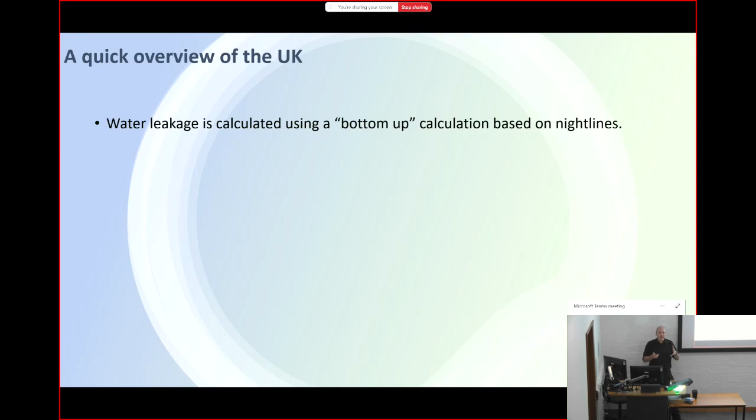And we said, okay, what we do is we monitor areas and we look at the night line. We look at how much water is being used at 3 o'clock in the morning. And we use that, and we say okay, that water use at 3 o'clock in the morning, some of that will be usage and some of that will be leakage. And we make estimates and we base it upon that. Do that across enough areas, round it all up, and you have a leakage figure for your calculation.

And then what we do is on an annual basis, well in fact we do it more frequently these days, you do a reconciliation. We go, okay, let's do a top-down full water balance, all the water going into supply where we think it's going, balance it up with our leakage at the bottom, the two should match up.

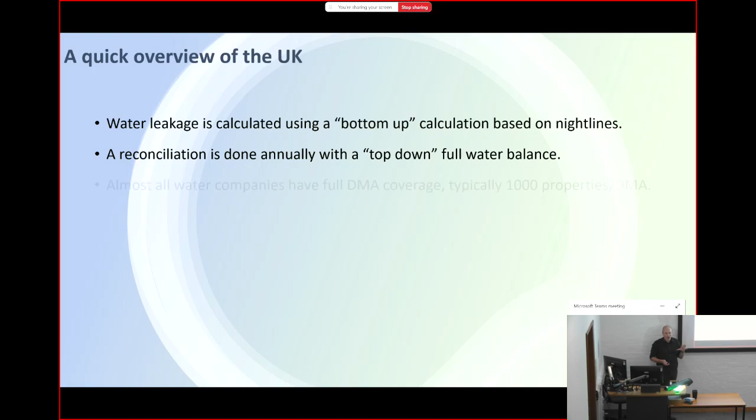In the UK, almost every company will have full DMA coverage, so a district meter area, DMA, typically about 1,000 properties in every DMA. And we have, as part of our reporting, we report losses on the customer side.

And this is the big difference. When you talk about international comparisons, typically they talk about non-revenue water. So as soon as water is charged for, as far as they're concerned, that's not their issue. What we have in the UK, because we came up with this bottom-up method of doing leakage, where we said okay, look, we're measuring all the leakage that's occurring, we don't know whether it's on our pipes or it's on the customer side, because it's happening at 3 o'clock in the morning. So we actually record customer side leakage as well.

And that can be on their supply pipe, the pipe going into the building, but actually loads of it we know is going on toilets and things like that. So what we call plumbing losses inside the house as well. So that's included in our leakage figure. And we estimate that that's typically about 25 to 30%, 35% of our leakage is actually on the customer side.

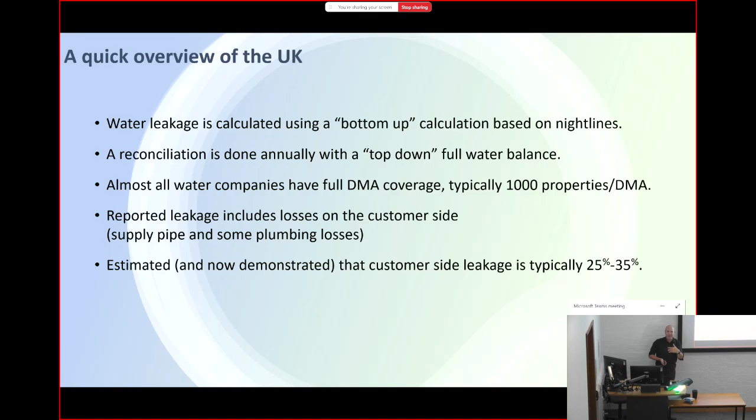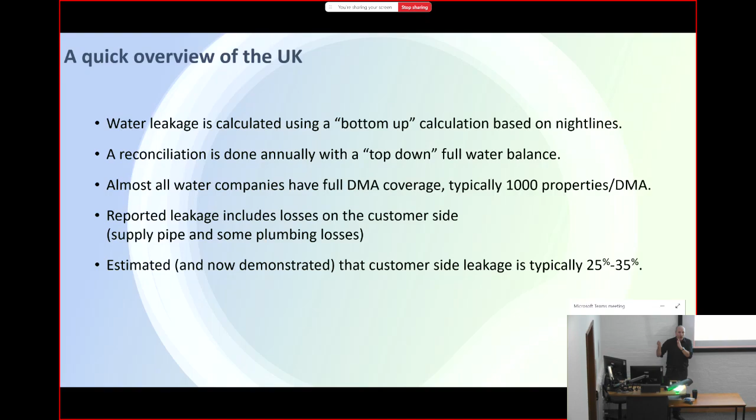It's one of the kind of messages we've got to get through in the UK with our press, who talk about all the company pipes are leaking. Every time you see those figures in the UK press, you can kind of take a third off, because actually our company pipes are about 2/3 of that, and about 1/3 of that is going to be customer side leakage.

So typical figures you'll find in the UK: 8.7 cubic metres per kilometre per day, 113 litres per property per day. That allows you to do some international comparisons.

I really don't like percentages for leakage. The reason is, imagine I've got 100 megalitres going into an area a day and my leakage is 10 megalitres - that's 10%. But if I double my consumption, getting everybody to use twice as much water, I've got 200 megalitres going into the area, still only 5% leakage. I've halved my leakage figure by simply doubling consumption. That's why we don't like using percentages.

But if we're going to do it that way, for my company we're leaking from our pipes about 8%. So again, mentally with a third overall total leakage, that's 12 to 13% within my company area, but our pipes are about 8% leakage.

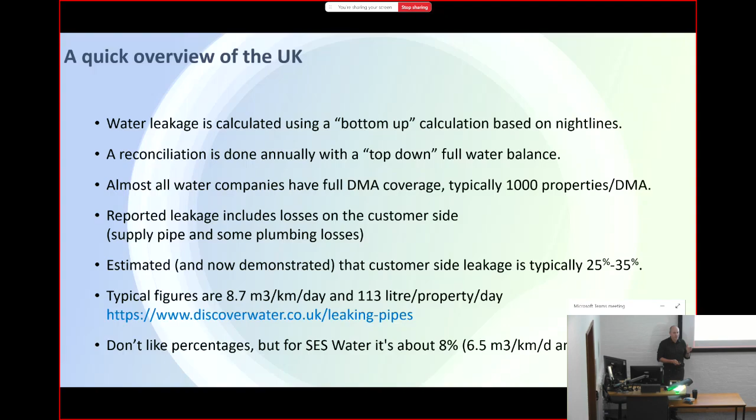They said by 2050, the estimated supply gap in the UK is 4,000 megalitres per day - that's the gap between how much water we have and how much water we need. They have since revised that figure and said, actually we think we got that wrong. They revised it up - they now believe it's 4,800 megalitres a day. To put that in context, that's the entire distribution input, all of the water supplied daily by Thames, Severn Trent and Anglian put together.

The reason for that is because demand is going to go up - more population, more usage and everything like that - and at the same time, our availability of water, because of climate change, is going to go down. So we are going to be missing nearly 5,000 megalitres a day in 25 years.

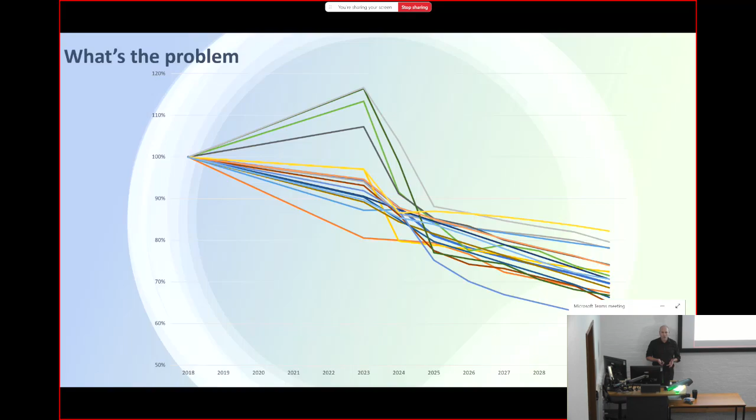We've now got to really push it down even more. And the reason is, if I plot every single water company's leakage figure on there, that's what I'm getting. Why are they going up? Because it's hard. This is not going to be easy. And a number of water companies are actually struggling to drive down their leakage at the moment. And it's not for lack of trying, it's not for lack of experience. They've got good people in there who know what they're doing. But this is really, really not easy to do, and they're struggling to manage it.

And so what we're doing is going, okay, look, in order to solve leakage, you need to bring in a multitude of tools. The danger comes is that everybody thinks there is one silver bullet that will solve leakage, one solution. You just put that in and that's going to solve leakage. There isn't. So we coined this phrase PALM: prevent, aware, locate and mend. You want to solve leakage, you've got to do all 4 of those brilliantly.

So when we look at prevent, we're looking at asset renewal, changing our pipes, finding the leaky old ones. When we look at pressure management, we're looking at network calming, stopping all the pressure waves going through our systems and causing bursts.

We look at awareness, let's understand where leakage is breaking out. If we can't stop it, let's at least know where it is. That's about dividing your network up into areas so you know where the leakage is occurring. It's about understanding, is the leakage occurring on my trunk mains? Is it on my distribution mains? Is it on the supply pipes? Is it within the customer's properties? Be aware of where that leakage is, and that's about DMA management, data consistency, flow analysis, all of those bits.

Fine, we now know that leakage is occurring in this area or on these types of assets. We then have to locate it. So you've got to go out there and say, okay, active leakage control, literally feet on the ground, going around, listening on fittings, trying to find the leakage. Acoustic correlation, so devices that are going out and correlating that leak and saying, it's louder here, quieter here, that means it's further towards this fitting. And then non-acoustic methods, and we're seeing a rise in those. Satellite solutions, fibre detection, all of these methods that are coming in that help us localise that leak and say, here's where it is.

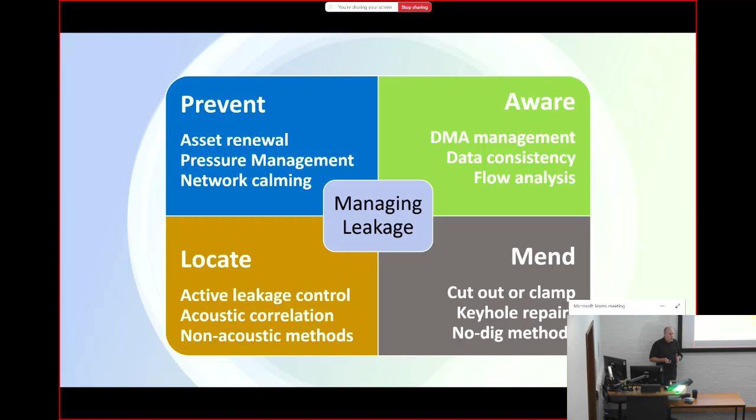But there is no silver bullet, and those of you who are thinking about going into the water industry and want to work in leakage, recognise this. You will help solve one of those areas, you will work in one of those areas and try and drive understanding in that area. But there is no one solution that will solve leakage.

I've got 15, 16 completed. We have a load of research going on across the UK, and this is fundamental research, trying to understand mechanisms. I have PhDs working on understanding the failure mechanisms of cast iron, how cracks develop and grow.

I've got other work going into acoustics - how do we make sure we get the best value out of all the sound that's coming out? I've got research projects where I've brought in a consultant to look at all the metering data, and say, if I've got all the smart meter data for an area and I know the flow going in, can I balance the two up and understand what's going on in that area better? So there's a whole host of research going on in that area.

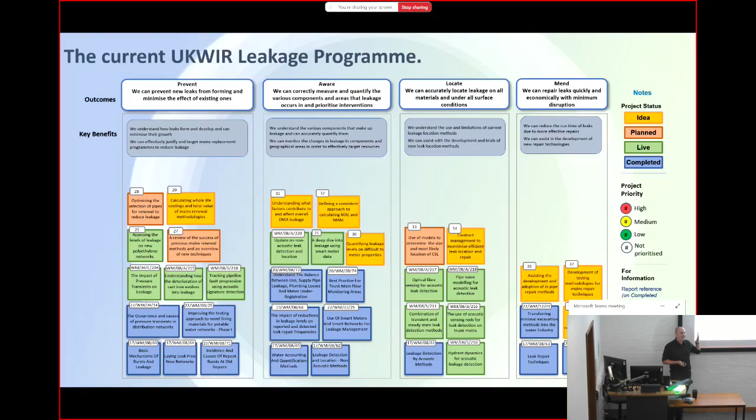But as I said, this is generally fundamental research. What we've also got is other stuff as well. The great news is the water companies collaborate almost completely on water leakage. It's nice - we don't get benchmarked against one another. I showed you that graph with all the different companies. There's no financial disincentive for me to share my expertise with other water companies.

Although we are monopolies in terms of how we operate, we are encouraged to share and collaborate. We fund joint research, but we also share the results from our own projects. Each company will have their own little projects that they're working on. And what we've done is put that all together into something called the Leakage Innovation Heat Map, which is almost unique, certainly in the UK, as far as I'm aware worldwide as well, where we map out all of the research that's happening in leakage in the UK at the moment.

You can actually download it. It's publicly available, it's on the UKWIR website. You can go to that site and pick up this project list. It will give you 420 projects within companies, either recently completed or live at the moment, or even ideas saying these are the problems we're looking at the moment.

What I've also put on that heat map is all the shared innovation fund projects. Ofwat have got a massive innovation fund that we can pull upon, and I've put all the ones that relate to leakage on that list as well. The UKWIR projects, links to the actual projects are on there too, so you can download and read those studies we've done, and Spring showcases. Spring is the innovation platform for the water companies, and you'll find a number of showcases on there about various solutions people have shared.

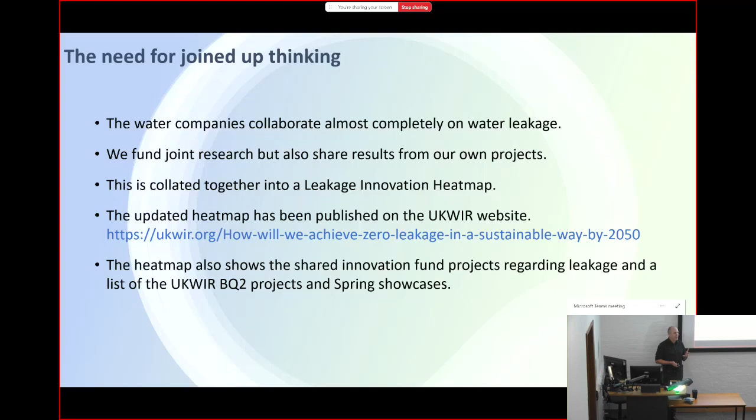So there's a wealth of information. The idea of this was to be a one-stop shop you could go to and find out what is going on in leakage at the moment in the UK. So the kind of details you get - company projects, as I said, nearly 420 in total - it will give you what the project is, broken down by project type.

The green are prevent ones, then you've got aware ones, but even within that we break it down by sub-areas as well. So if you want to look at supply pipe replacement projects, all of those you can see at the top. And you can see it by company and what they're working on.

It allows us to start to say, okay, how much research is occurring in different areas? And this is what we found: 18% of all our projects are actually in prevent, nearly 70% are in awareness and location, and poor old mend, as I said, 11% there. If you look at the live projects, it's a similar view - most of the research taking place in awareness and location, but very little in prevent, and hardly any in mend.

Part of the reason behind that is how our companies are structured. If you look at it, our leakage managers have control of awareness and location. So they have the software solutions dialing out, bringing in information on what's going on out there, and they control the teams that go out looking for the leaks. So therefore it's quite natural those are the bits they can control. Typically prevent will be managed by another department because it's the department that actually manages the network - they open and close valves.

They're about network pressures and network calming, and they tend to deal with network replacement as well. So though the leakage managers have influence there, they tend not to control that area.

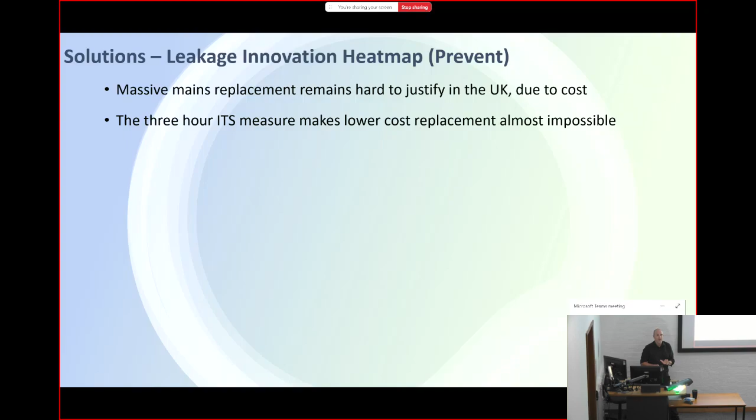In addition, in the UK, we have a 3-hour interruptions to supply measure, which says you're only allowed to turn water off for 3 hours. That's almost unique - I'm not aware of anywhere else in the world that really has that measure. And what that means is that any solution to replace the pipe which uses the existing pipe - so if you're going to slip line down a pipe, drawing another pipe down the old one, or if you're going to reline a pipe using a structural or semi-structural liner and you've got to use a dry pipe to do that, you've got to drain it out - all of those methods are really difficult to use within the UK. So it makes lower cost replacement almost impossible at the moment.

And the problem that we've got is our system's increasingly aged and needs replacement. What we do need is a good understanding of asset condition. So we know that we have loads of cast iron still out there, 40-50%. But what condition is that in? It's buried 1 metre below ground. So what we're trying to do is build our understanding of how that fails and what's the current condition of that asset.

One of the pieces of work I've been doing is effectively using a Canadian technology that uses a sound pulse. In the old days, what they used to do when they had a steam engine and wanted to check the integrity of the wheels is they would walk along with a hammer and bang the hammer against the wheel.

And if it went bang with a nice loud ding, it was good. And if it went dunk, you'd know there was something up with it simply by the sound it made, because the speed of sound changes as it goes through different materials. So by using the speed of sound passing down cast iron mains, we can tell the condition of it. And we started surveying our mains to do that within my company.

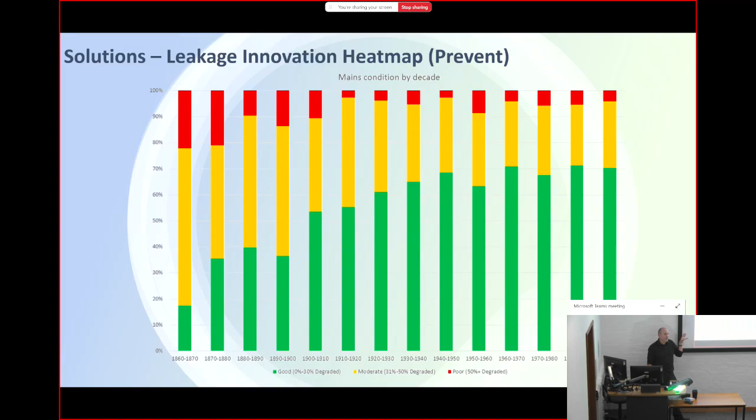It's not even as simple as saying our older pipes leak more. So one of the things that's now published is the data sets for all of the water companies. In fact, you can go on something called Stream Open Data, and you can download data sets for all of the water companies, and I did that.

So I downloaded every water company's data set, and one of the bits of information they have on there is how much main they've got pre-1960s. So I said, okay, let's do a simple correlation. I can see your leakage figure from your data sets, and I can see how much main you got pre-1960s. Let's put a little experiment up there. My view would be is that if you've got newer mains, they should leak less.

Part of that is because since 1960, we've had 3 new materials introduced. We've had ductile iron, PVC, and polyethylene. As each new material came in, there was a learning process on how to use it effectively. Ductile iron came in, and we just threw it in the ground, and then only about 10-15 years later realised that it corrodes faster than cast iron, and we need to wrap it. And you now start to see all sorts of layers over the ductile iron in order to protect it.

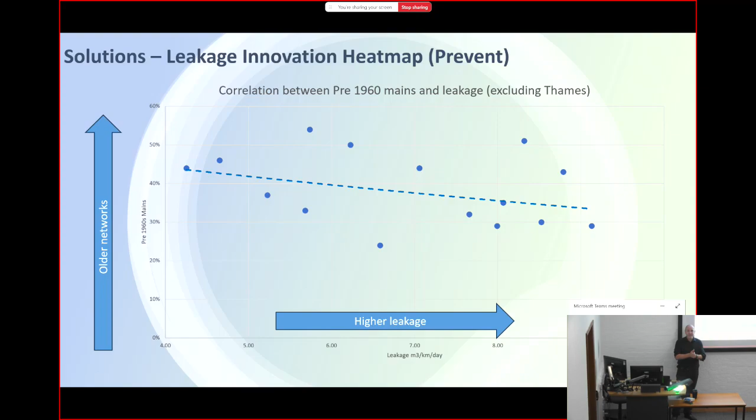And then PE came in and we said, what a wonderful material. PE, we can bend it all over the place, fantastic. Can we join it? No. I can see shaking of heads around the room. Joining PE remains really difficult to do, because every time we're doing fittings, we do them in the lab and it works absolutely perfectly. And then we take it out onto site where effectively what you're going to be doing is melting plastic and pushing it together, and suddenly we're on a site that is dirty, wet and muddy, and it doesn't join so well. And it may get a joint at that point that holds pressure, but a year down the line, suddenly that joint fails. So we struggle with these materials as they come in.

We need to make sure that as we introduce these materials, the training materials are there to make sure that they don't leak in terms of what we're doing there.

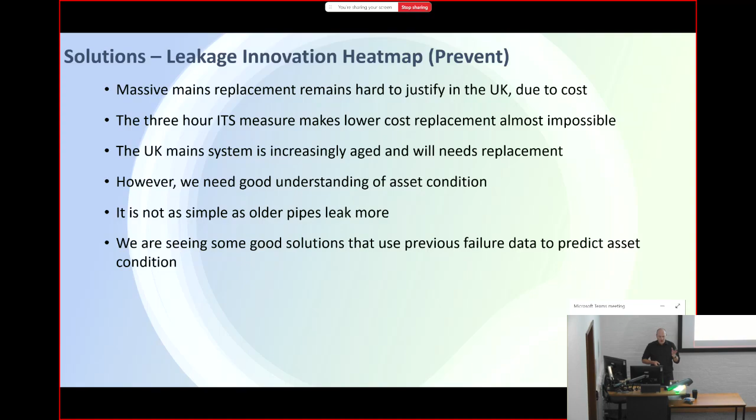What we are seeing is some good solutions coming through using previous failure data, and that's starting to predict our asset condition and saying this is where we're going to see problems.

I wanted to touch upon pressure management as well. Pressure reduction is a vital tool in reducing leakage. We've got a project at the moment called DMA Asset Health, and that's probably state of the art in the UK. We have the most pressure managed number of properties in the country.

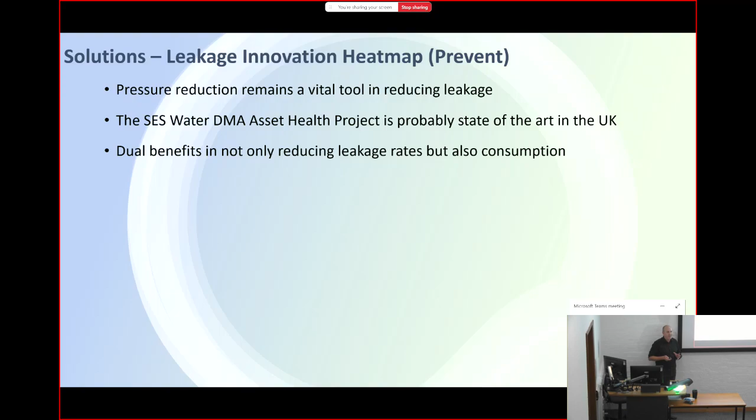80% of our properties are under pressure management. It has a dual benefit - it reduces leakage rates, but it also reduces consumption. However, some of the latest research I'm seeing is suggesting that as you reduce the pressure, you will get a short-term benefit, but it may not be there long-term. Your mains may then start to crack again and things like that. So it's not as simple as just reducing pressure is going to solve absolutely everything.

We are finding, though, even within our highly optimised systems - and we started doing DMAs back in the 80s - we're still dividing them down and getting smaller DMA areas. Pressure calming, stopping those transients going through the network, is extremely important. Less so if you've got a fully plastic or at least a PE system, still relevant if you've got PVC. But pressure calming is increasingly becoming important.

We're starting to recognise how many pressure waves go through our network. I did a research project recently with UKWIR that looked at the causes and effects of transients going through. We found that our networks are really, really noisy - loads of pressure waves going up and down our system. What happens is those pressure waves simply move through until they find a weak point, and you've got a burst. So calming is really important as well. Keep your systems as calm as possible.

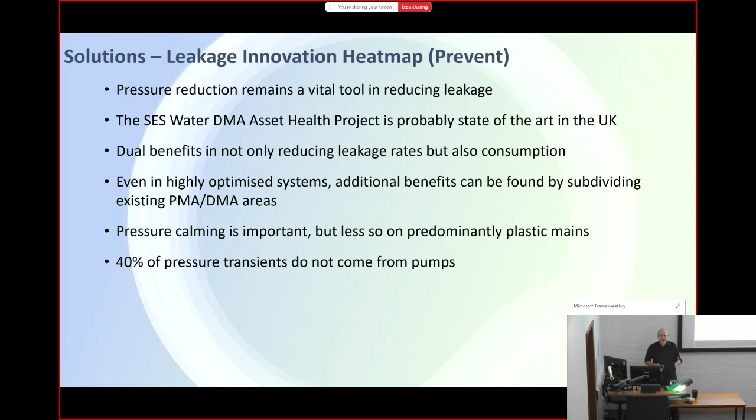We know that about 40% of those pressure transients don't come from pumps going on and off. It's ball valves slamming shut inside large properties and things like that. It's network operations where you're opening up a valve or a hydrant that are causing pressure waves to go up and down the system. When you talk with water companies, they'll tell you that the quietest day for leaks tends to be Christmas Day, and the reason for that is because that's the least amount of network operations.

Awareness - most awareness solutions in the UK depend upon DMA monitoring, monitoring these small areas and trying to understand what's going on with them. In my company, most of our DMAs are a single feed, but a number of water companies have multi-feed DMAs. Now, multi-feeds are useful in the sense that if you have a burst upon one of your entries to a DMA, you've still got another way of supplying water.

However, for managing leakage, they are a bit of a nightmare. Because if you've got 2 meters coming in and one goes down, effectively you're blind. I know some companies that have got 6 or even 7 meters feeding a DMA, and as soon as one of those has a problem, effectively you don't know what's going on within that area. So multi-feed DMA is less than optimal.

In the UK, the standard data granularity is 15-minute data. So we sample every 15 minutes and we bring it back every hour.

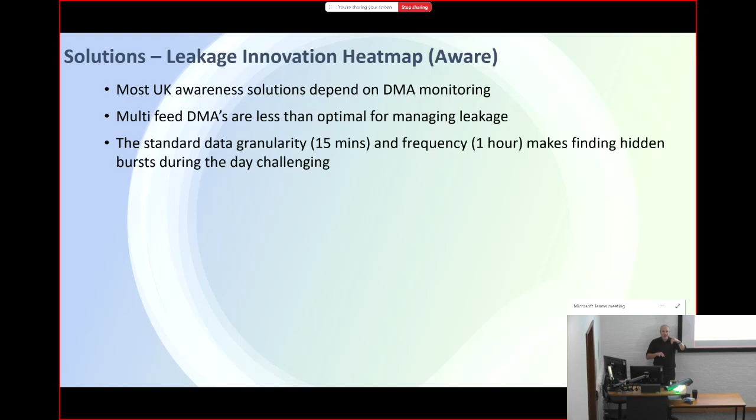The reason for that is because of the old loggers we used to have. When I entered this industry, I would go out installing loggers in the field. I would go out and find a hydrant, put a pressure cap on it with a fitting, and I would take my logger, which I programmed up in the office because we didn't have laptops, and I would plug it in and leave it there for 2 weeks, then come back 2 weeks later and unplug it. That logger I had to carry around in the car with a battery only had a certain amount of data capability. As a result, the whole industry standardised back then in the 80s on 15-minute data.

Unfortunately, even with all the modern data sets coming through, the modern capabilities, we still run on that 15-minute data.

What we find is that makes finding leaks during the day very challenging. When you're looking at 15-minute data, looking at consumption actually occurring at the same time, it's nigh on impossible to find a leak in that data. That's why companies use that night line. The only way they're going to be aware of a leak breaking out is by looking at 3 o'clock in the morning and saying, has the area gone up then? Because during the day, the signal to noise ratio is too difficult.

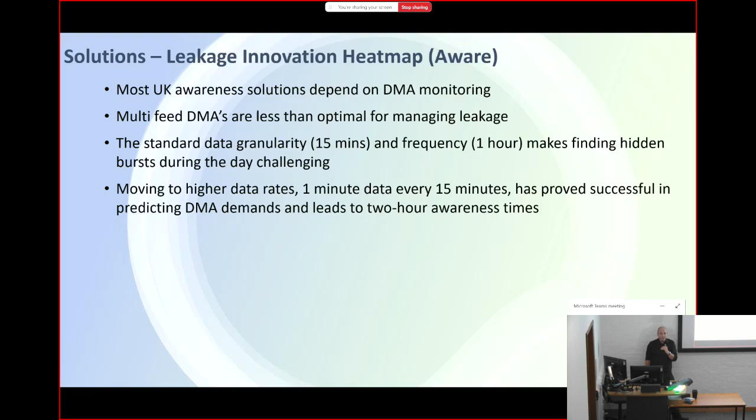We've been moving to higher data rates. Within my company, we've actually moved to 1 minute data every 15 minutes. And when we did that, we found that we could do DMA predictions during the day. So that's actually led to, within SES, we now have a 2-hour awareness time. Rather than having to wait for that night line, we now know roughly within 2 hours of a leak breaking out. And that could be a hidden leak under the surface, with no customer phoning in.

Just to give you an example of what that actually means: I talk about night line and using a night line. Typically for awareness, it's 3 days. So let's imagine a hidden leak has broken out just outside the building here, on the pipe outside. Nothing showing on the surface, and it's not affecting your water supply in here to the degree that you notice. What will happen is the local water company will see that go up, they'll see the DMA go up. So if it happened today, they're not going to see that until tomorrow at 3 o'clock in the morning.

And then they're going to come in, look at their data and go, oh look, that DMA's gone up. But you know what, it could be this place filling a tank. There could be some reason for legitimate use at 3 o'clock in the morning, you may be running experiments at that time. You go, no, that's exactly it, and it's not going to happen the next night. So no company will act on a one-night jump. Almost inevitably, they leave it for 2 nights. So it will not be until the 3rd day that they'll actually send anybody to investigate and start looking in that area. So the jump from 3 days to 2 hours has made a huge difference in terms of our awareness time.

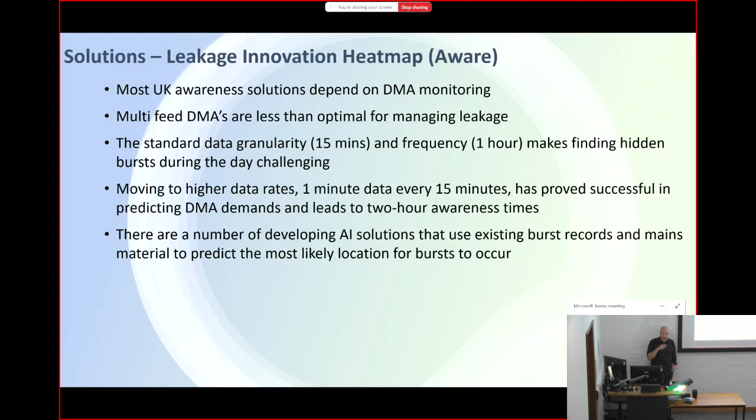There's a number of solutions now that use AI, looking at existing burst records and mains, saying okay, where do we think it's most likely to go? If I'm going to be sending people into an area, where do we start looking? What are the most likely mains to burst? And what's really interesting is that awareness tool is becoming increasingly an operational tool.

One of the things we're struggling with in the UK at the moment is what we call mass breakouts. One of the things I talk about is 3-mode breakout. We say bursts occur primarily because of pressure waves going down the pipe, finding a weak point and popping it. But we also see it in a winter breakout, a freeze-thaw event, where effectively the ground heaves. It's a one-off event. You come in one morning, it's been 3 or 4 days of heavy frost. As a leakage manager, it's a horrible feeling because you come in that morning and suddenly half your DMAs have jumped as a result of bursts. But it is a one-off event that just happens on that thaw.

The other one we're seeing, even more concerning, is climate change with soil dry out in the summers. The last 3 years, we've seen soil dry out and wet out in the summers, and that causes certain soil types to move massively. The peats around here, the clays in my area, massive ground movements underground. And as a result, you get a mass breakout of bursts. One of the predictions I'm making is that this is probably going to become one of the most prevalent causes of leakage in the UK with these mass breakouts.

That's why awareness tools are going to be increasingly important, because when you have a mass breakout like that, the awareness tools tell you where to start looking and enable you to get ahead of the game. One of my neighbouring water companies actually ran out of water from one of their water towers, one of their reservoirs, as a result of a mass breakout, and it meant thousands of customers were out of water for 4 days. The reason I tell you it's a neighbour is because we had exactly the same weather conditions, but we had our smart network up and running. During that same period of time, we lost supply to 48 customers for just over 3.5 hours. That's the difference good awareness can make. So the awareness tool is not just leakage, it's an operational tool.

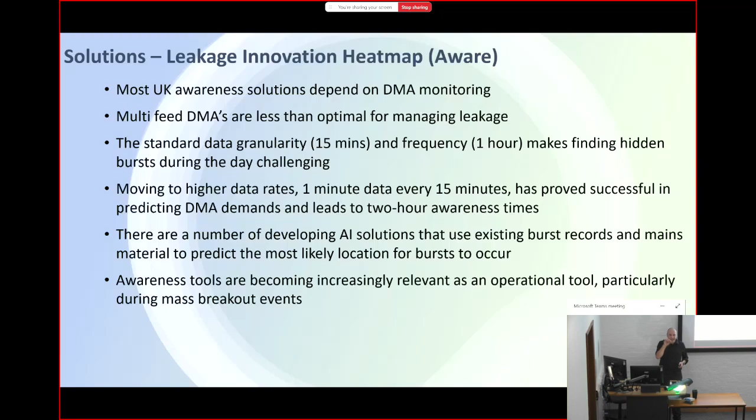Location. Many companies have got really well-developed acoustic networks for finding these leaks. But it's complex. You have loads and loads of loggers. Birmingham has 20 to 30,000 acoustic loggers spread throughout the city centre there. The analysis of that is complex. That's a lot of data points to look at.

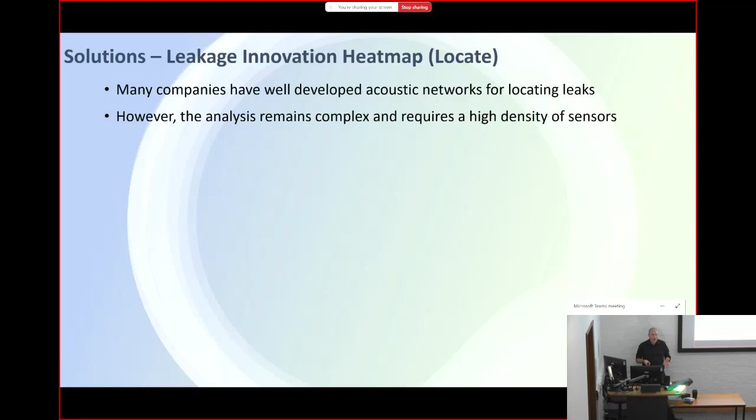In addition, because the sound doesn't carry too far down the mains, you're going to need loads and loads of sensors in order to do that. So although acoustics remains a well-developed system, companies are looking around for alternatives and going, how else can I locate leaks without having to put loads and loads of sensors out?

Anglian really pioneered the use of hydrophones. When we talk about acoustics, we're typically talking about accelerometers. These are devices a bit smaller than that, and they sit on top of valves and things like that, picking up the vibration of the valve. A hydrophone, by difference, actually touches the water column. So the sensor is in contact with the water and therefore gets a better signal. As a result, you need fewer sensors within your network. Hydrophones are particularly good at locating leaks on plastic because it doesn't attenuate the sound so much.

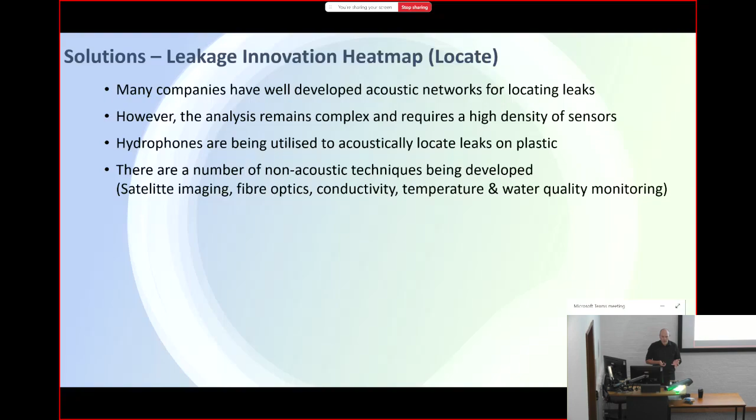A number of non-acoustic techniques are being developed, so satellites, and fibre optics using what's called dark fibre. This is where your cable company has gone down the road and laid a fibre network. We can actually use that fibre network and the vibrations of a leak causing a vibration in that fibre network. We can use that sound, that vibration, and localise the leak coming back from that as well. Water conductivity, temperature and water quality monitoring are other methods we're looking at to say how can we localise these leaks better.

A number of companies have been using satellite technology, with a variety of results on that one. And fibre optic, as I said, I think that's one of the most interesting areas because we don't have to deploy sensors - typically there's already dark fibre down those roads. It's just a question of how we hook into that dark fibre and start to use it. We're seeing some really interesting trials in that area.

Micro pressure variation - that's one that my company's been working on and developed quite a bit. So this is saying, okay, when a burst occurs, it will actually drop the pressure locally around that burst. Can we detect that pressure drop and react to that?

Now, there's a beauty about using micro pressure variation. With acoustics, it's really hard to tell from the sound what kind of burst it is. The big bursts actually tend to make the least sound. Where a pipe is fractured and running full bore open, there's very little noise coming out from it.

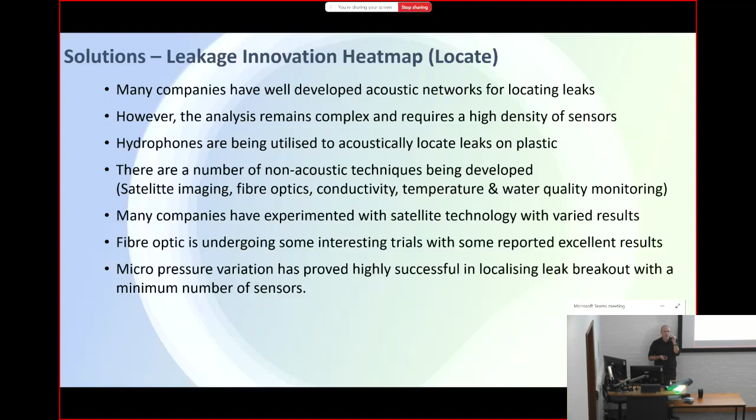With micro pressure variation, the size of the burst will directly affect the amount of pressure that we're seeing. So what we've been doing is deploying a number of sensors within an area, typically about 5 to 7 sensors, to measure the pressure and look for small changes in that pressure and see what that can tell us.

One of the areas, we're running this in about 10% of our area as a trial, and we were going out and opening up valves in order to try and simulate a leak and test it out. And then - I won't say fortunately, because I don't like bursts - we had a burst within one of the areas where we're trialling this. Now you can see the burst actually occurring here.

So here's our normal daily pattern, and here you can see there's a jump. That's the burst breaking out, and that's the repair. The area that it was in, Edenbridge, a small town just south of London, had 881 properties in the DMA there, and about 12 kilometres of main.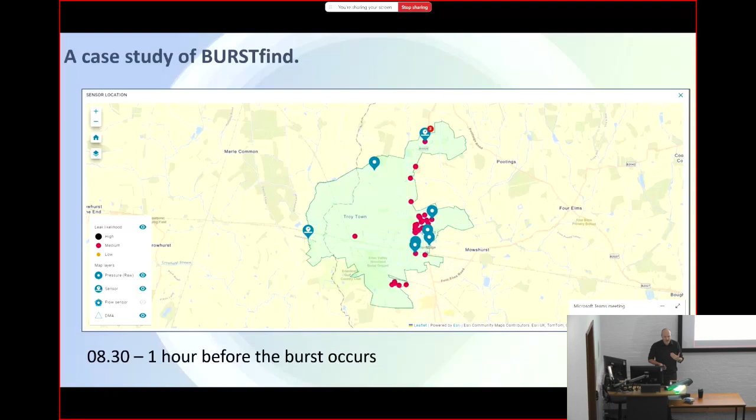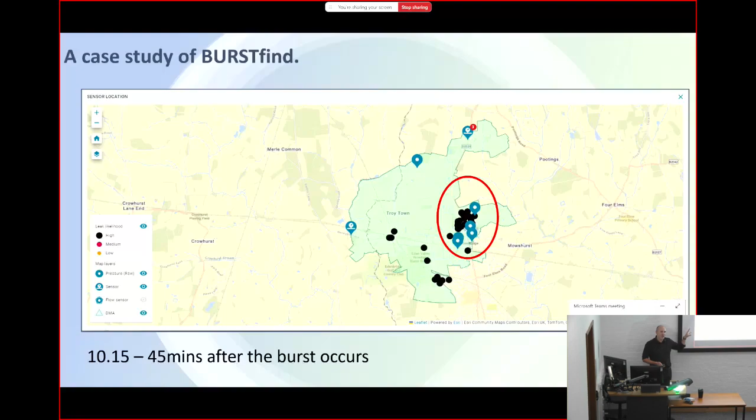8:30, one hour before the burst occurs. 45 minutes after that burst has occurred, you can see the change straight away. I now have high pressure loss in the area. No customer has phoned in, nobody has reported it, but our system picked it up and had alerted by this stage to say there's something going on. You can see that concentration of black spots on the right-hand side.

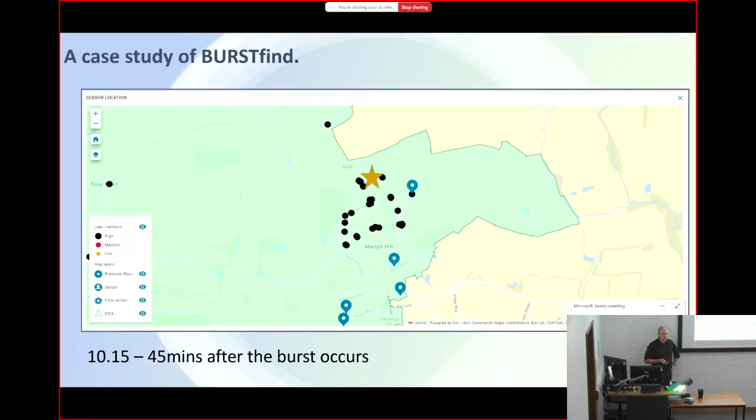As we zoom in, you can see there's loads of low pressure alerts coming in around that area, and you can see where we located the burst when we sent an inspector out to find it - a hidden burst, nothing showing on the surface. The beauty of that one is this: that leak occurred at 9:30 in the morning, peak time, the hardest time to locate a leak because everything else is going on at the same time. Our BURSTfind system reacted within 45 minutes and localised it down to street level.

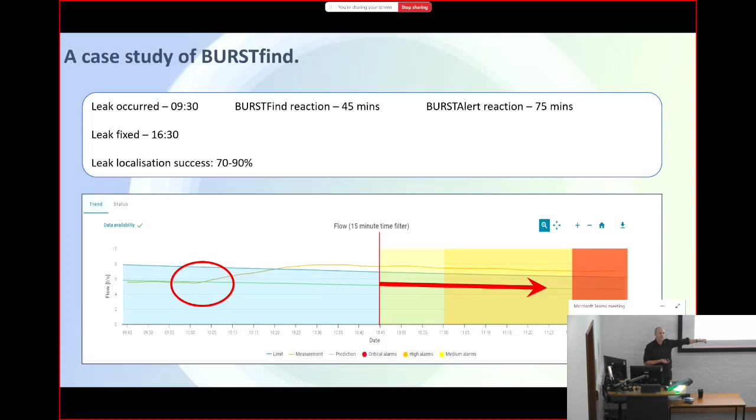Interesting enough, the DMA alert system, which uses a learned flow profile using AI, alerted within an hour and a quarter, 75 minutes, so that was later. We got the leak fixed by 4:30 that afternoon. Now that's really impressive - no effect upon customers in terms of going out of supply until we actually went out and did that leak repair. That's the kind of system that makes a massive difference in terms of driving down your leakage. Once a leak has occurred, the clock is running - the longer you leave that leak running, the more water you're going to lose. So awareness, location, and mend need to be as fast as you can possibly make it.

Okay, that leads on to the final bit: leakage innovation heat map is mend. Yes, as I said, very little development work on mend. It's the area with the greatest spend, 52%.

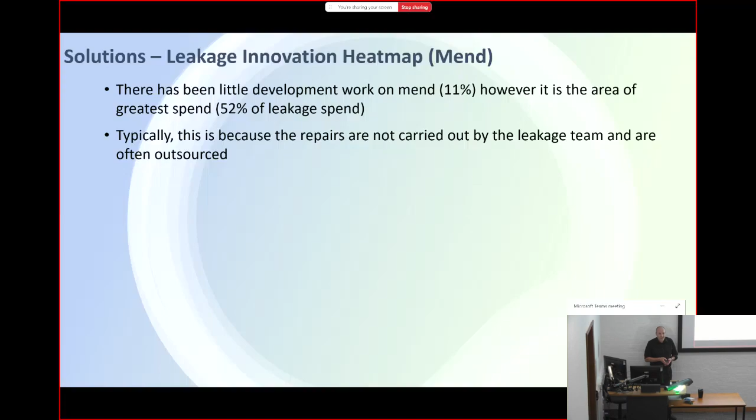Typically, this is because the repairs aren't carried out by the leakage team, it's outsourced. Unfortunately, if you're a contractor, what happens is you win the contract to do the main repairs for a certain water company, and the first thing you do is go out and get some JCBs, because you're going to need a lot of them. You're hiring these JCBs - they're owned by another company, you hire them, and they sit in your yard. But while they're sitting in your yard, they're not earning you money, so you want them out digging holes. So if you have JCBs, everything looks like a hole. And if the water company comes along and says, 'I've got this amazing new method, we can repair pipes without having to dig holes,' what happens to my JCBs?

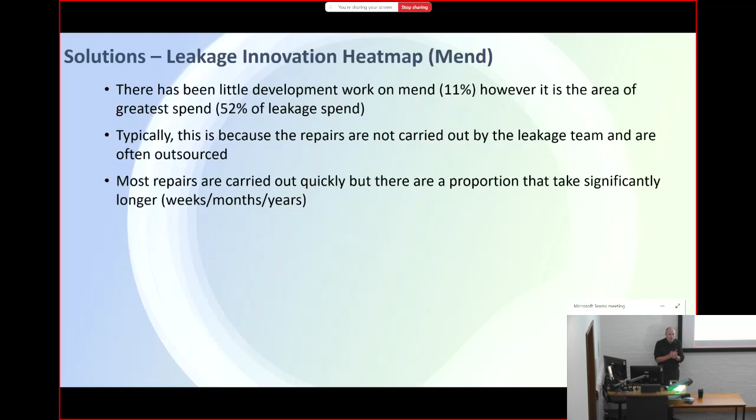Now, I don't want to be unfair on contractors - they're incentivised to do that because that's how we write our contracts, that's what they bid for. What we've got to do is come up with different ways of managing our contractual arrangements to incentivise the right behaviour. Most repairs we know are carried out quickly, but there's a proportion that takes significantly longer - weeks, months, in some cases even years. The reason for that is it's not a big leak, and the cost of actually repairing it is so disproportionate to the actual cost of water going out through that leak, that companies will say it's not worth going in until it's showing on the surface, until it's causing a disruption to our customers.

How do we deal with these ones? As I said, most contractors have little incentive for low dig and no dig methods. Let's talk about low dig - it's the idea of keyhole surgery. When I describe it, I always say I'd like to be able to repair a pipe through a piece of A4 paper - imagine laying that down on the ground, digging down, carrying out a repair, and then reinstating through a small hole. It has a number of advantages: it's less disruption, and it's far more acceptable to the councils for you to come in and do work like that. So we're looking at low dig methodologies as well.

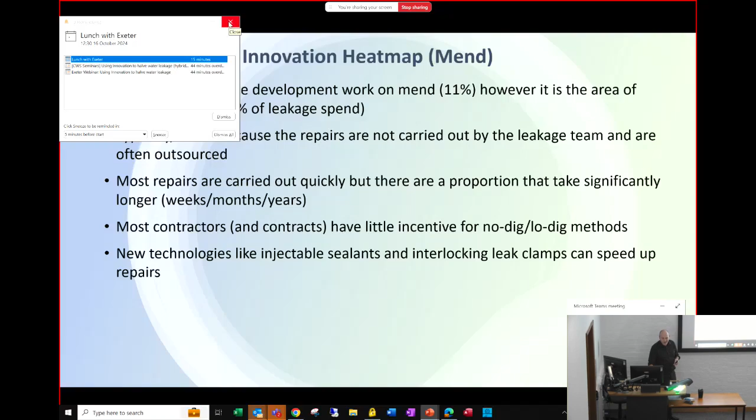One of the rises of things we're seeing is sealants. There's a number of companies that have developed sealant solutions. We're starting to use those on small diameters, so typically supply and comm pipes. But actually this is like Radweld for pipes, where you literally inject this solution down, it's going through, it's finding the leak, and it's sealing the leak at that point. Now to me that's a brilliant solution.

I really love that idea that we can seal. We don't know the longevity of these. The ones that we've done have been about 3 years old and they seem to be holding up absolutely fine. But you know what, to me actually longevity isn't the main issue.

I'm very, very happy with the idea of temporary repairs, and I'll tell you why. Because you're thinking, no, hang on, everything should be permanent. If you cut your arm, it's a nasty bleed and you're going to have to go to the hospital to get it fixed. Do you leave it going full flow? Just let it bleed out on the way to the hospital? No, the first thing you're going to do is put a temporary repair on, a clamp, a plaster, a bandage, anything to stop that fluid getting out, because blood is valuable.

You don't want it leaking out until you can do a full and proper repair. Think about water in the same way. If water is valuable to us, a temporary repair where we can reduce that flow rate until we can do a full repair is important and valuable to us. So don't rule out the idea of temporary repairs. They are equally valuable for water companies as well, if we can start to get those in.

We're seeing things like interlocking clamps as well. One of the issues we get is when a pipe splits. When you get a split, it's really hard because you end up cutting out an entire section of pipe. You therefore have a long hole, and all of the bits you've got to take out an entire length. So one of the things we've all started using in the UK now is interlocking clamps, where you can put them together in a line and use them to fix splits and things like that.

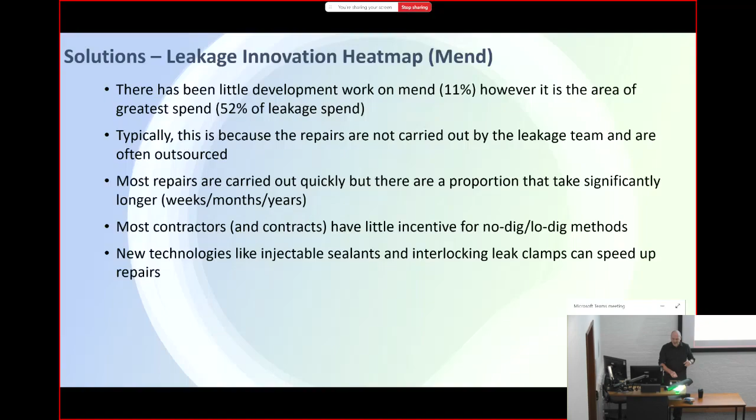And we're now looking at specialised teams to deal with difficult bursts and adopting new technologies, the idea of what I call special leak services, whereby we can say, okay, let's look at those really difficult to mend bursts, the ones that take weeks, days, months and possibly even years. And say, why don't we split those off and get specialist teams to deal with them, because it's a different skill set to repair those.

These teams can dig up if need be, but actually these are the teams that will adopt all of the new technologies coming through. So if a supplier's got a brand new bit of kit, who do I take it to? The contractors? They're not really incentivised. The water company? But they're not the ones actually doing the work. Special leak services will be the teams where they can go, right, let me bring it to you, because these will be the teams willing to try out new and different techniques to carry out fixes on these mains. My personal belief is mend is the next big thing that we've got to solve.

We're seeing loads and loads of solutions so far on awareness and location. As I said, about 70% of research is in that area, and most of the companies I talk to say there's no dearth of solutions there. There's a lot of stuff going on in those areas. It's just a question of us evaluating, adopting and rolling out the best techniques and solutions. That's not to say there won't be disruptors that come through in that area, but they'll be rarer because they've got to overcome the hurdle that companies already have techniques there. Prevent, yes, certainly there are some areas in prevent, but it's less well developed.

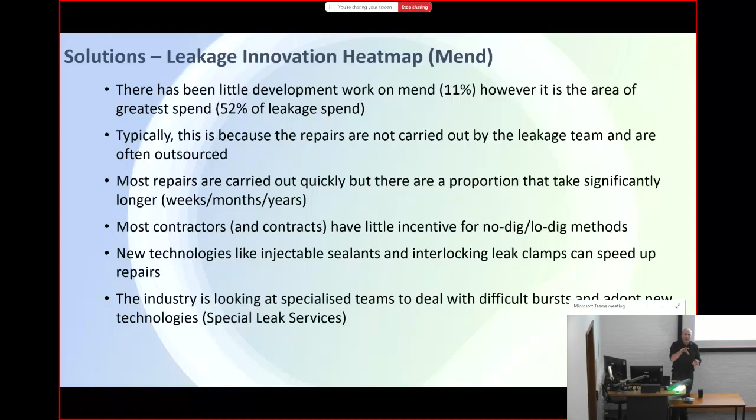But the area I think is most productive at the moment is the mend one, because typically on average it's 4 or 5 days to carry out that repair. What if we can shave 2 days off that by simply organising ourselves better, bringing in better techniques and tools, so the leaks don't last so long because we can't get there - it's right by traffic lights, or another contractor is working in that road, or it's too deep and we can't get on it easily. If we can come up with better ways of dealing with those, that's going to have a huge advantage in terms of driving down leakage.

I'm going to pause there. I think that's basically me for the moment, and I will put up any questions. Sorry, I've talked for 40 minutes or so. Thank you very much for your attention.